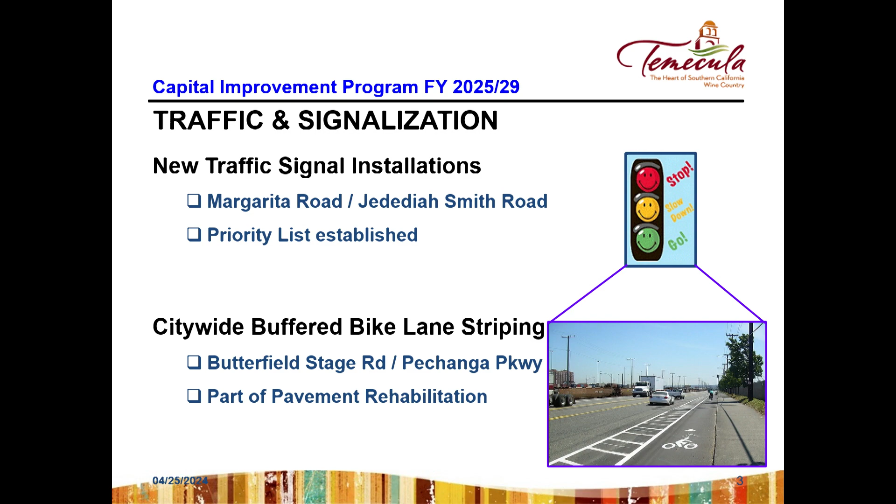We're going to be doing buffered bike lane striping on Butterfield Stage Road and on Pechanga Parkway. Then we have a set of 4 projects that our traffic engineer, Nick, managed to get a Highway Safety Improvement Program grant for, in the amount of $4.3 million. The first is the bike lane upgrade, doing the green backing for the bike lanes citywide. The second is pedestrian ramp upgrades at various school sites around the city. Then we have pedestrian signal equipment upgrades, installing ADA pedestrian countdown signal heads. And the last is safety lighting and signal communication, involving safety lighting, signal heads, signal wiring, traffic signal cabinets, and traffic signal timing. All these projects are currently in design, and when ready to be implemented, most of them will probably be implemented in the next fiscal year.

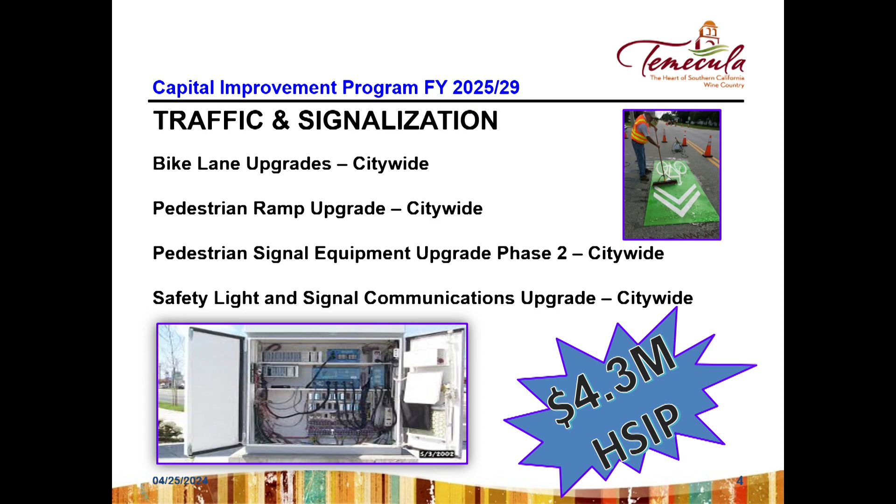Next, we go to roads and highways. One of the first projects is the roundabout on De Portola Road at Jedediah Smith Road. We received an $800,000 grant, the Economic Development Initiative, part of Congressman Issa's submittal. We will be initiating this, I believe, at the May 14 council meeting.

We will be approving an agreement for the design of this roundabout with a selected consultant. We also have Diaz Road, which we've been working on for some time. We're looking to widen Diaz Road from Rancho California Road to Cherry Street, delivered in 2 phases. We're almost done with the design of phase 1, from Rancho California Road to Winchester, and can go to construction in early 2025. We have to wait for EMWD to finish their sewer line, which is under construction right now.

The next one is the bridge over Murrieta Creek at Overland, which we've been working on for quite some time. Design is about 60%. We just got the environmental document approved for NEPA, the federal environmental document. The timing for this project is probably going to be fiscal year 2026-27. One reason is the Murrieta Creek Flood Control Project, which I'll talk about a little later. We have to coordinate the construction of that bridge with the proposed improvements for the Murrieta Creek Flood Control Project.

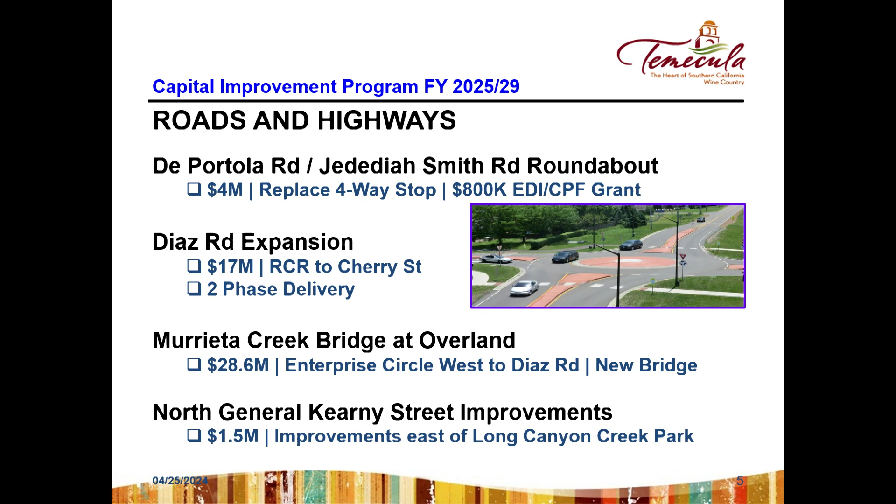We have a few more road projects we're working on. Overland widening will eliminate the bottleneck between Jefferson and Commerce Center Drive. The design is almost done, so in the upcoming fiscal year we'll be beginning some right-of-way acquisition that we need in order to widen that section of Overland.

We're also going to be adding raised landscape medians on Rancho California Road between Hummer Drive and Butterfield Stage Road. This will enhance safety and beautify the entrance to the city of Temecula from wine country.

The last project here is the Ynez Road Improvement Phase 1, widening Ynez Road on the east side between Rancho Vista and Tierra Vista by the duck pond. We're probably close to 90% plans on this project. We've submitted for the environmental permits, and once we get those permits, we can probably get this project out to bid for construction, so we're looking to do that in this upcoming fiscal year.

I got a question on that one. Yes, sir. Will this coincide with the opening of that housing unit there? Maybe Ron, he's working with the developer on the housing.

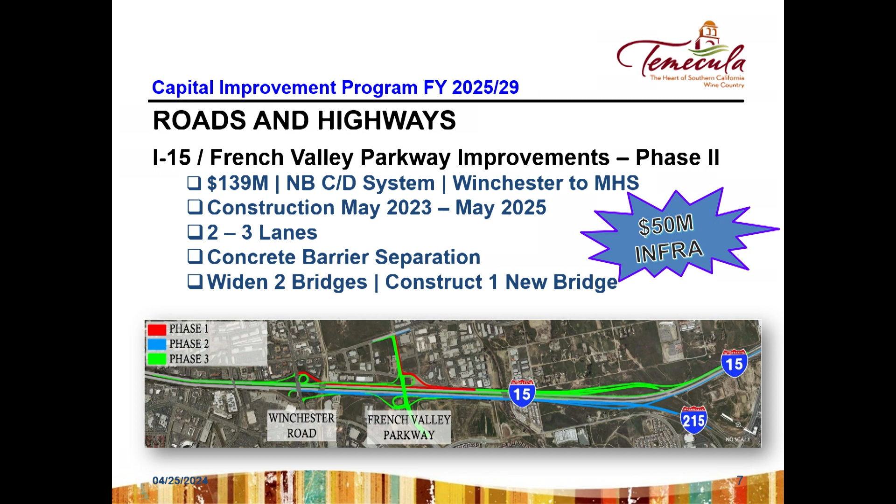We also have another freeway project under construction that began back in February - the auxiliary lane between the Temecula Parkway northbound on-ramp and the Rancho California Road northbound off-ramp. That project began in February, and we are set to complete it by December of this year. They're really moving along very well, the contractor is.

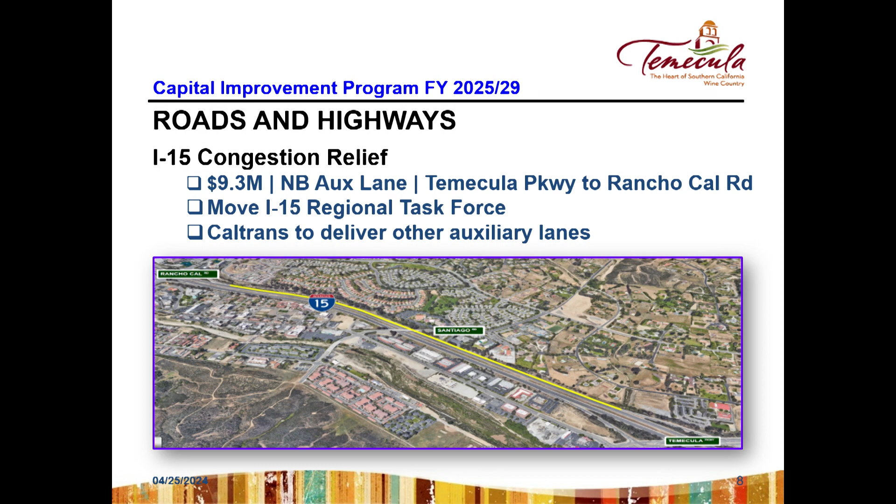Okay, as part of the city strategy to invest in our roads, we have a number of projects that are coming up. And before I go into these projects, we did a new assessment of all our roads this year. We do that every 5-6 years, so we just did the assessment.

We got some preliminary results, which told us that we're actually above average in the condition of our roads. Our pavement condition index is 71, which is a lot higher than most cities in the state, which are probably in the 60 range. Last time we did this assessment our PCI was 64.

So we've improved a lot, and that's because we've been investing to rehab our roads over the past 5-6 years, and we continue to do that. We have in the program anywhere between $3 million and $5 million every year dedicated for the rehabilitation of our streets. This upcoming year, we're going to be doing Butterfield Stage Road from Temecula Parkway to the southern city limit, and then Pechanga Parkway from Temecula Parkway to Via Eduardo.

We also have a separate project that's going to be done, Rainbow Canyon Road from Pechanga Parkway to the southern city limit. The Rainbow Canyon Road project is primarily going to be funded by our great partner, the Pechanga tribe.

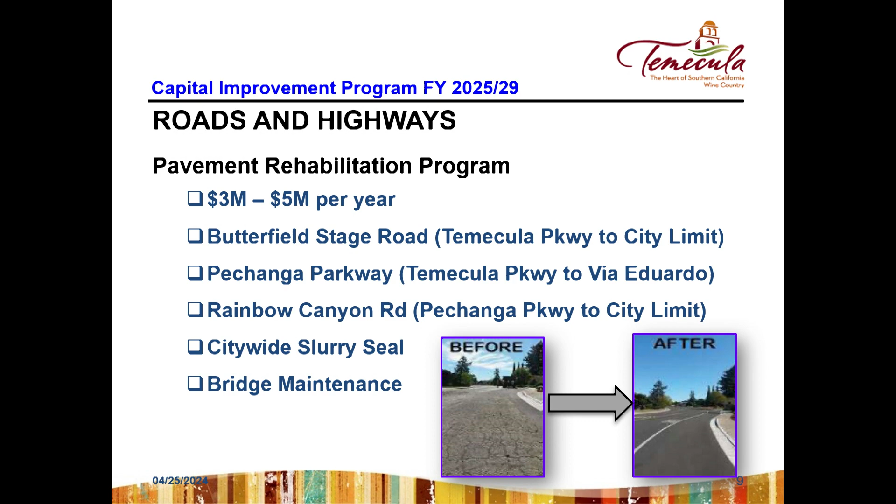We also, a few years ago, I think it was 2016, did a sidewalk gap study, and we've been working every year to do more sidewalks. So in this upcoming year, we have 3 primary sidewalk projects.

The first one is Pauba Road, from Elinda to Showalter by the library, and then Ynez Road, on the west side, between Rancho Highland and Tierra Vista. There's a missing piece of sidewalk close to the new steak place there.

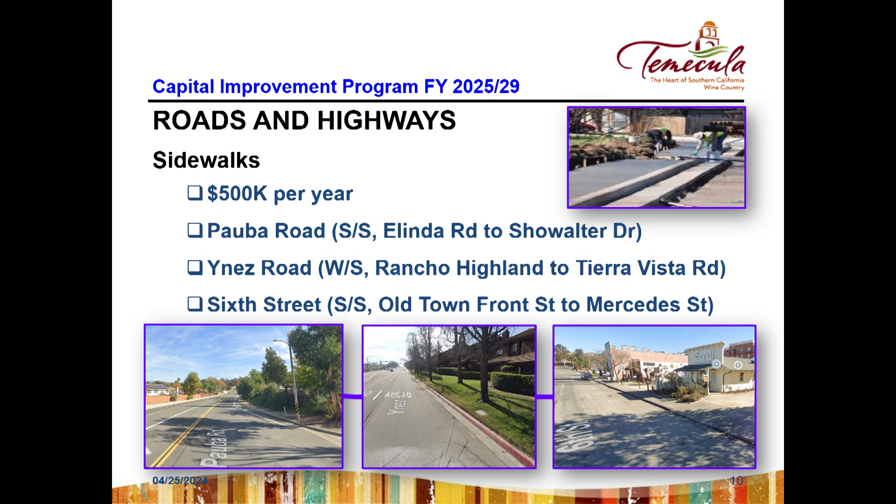And then in Old Town, we'll be doing the south side of 6th Street between Mercedes and Old Town Front Street. So those are all going to be done, probably within this year, before the end of this year, we'll be starting construction. They're all close to finishing the design and getting ready to go to construction. So we have a lot of stuff coming up in 24, 25 for construction.

Then we have a few other projects. A few years ago we did our ADA transition plan, and we've been budgeting the Community Development Block Grant annual funding to do ADA improvements. We've done a few facilities, like the Mary Phillips Senior Center and the Community Recreation Center.

Using these funds, right now we have a project under construction at the Ronald Reagan Sports Park baseball field. We're improving the accessible parking, and we have an accessible ramp that goes from Margarita Road down to the field now. It's already been constructed, and we're also making all the dugouts accessible. So that project is under construction, probably going to be finished sometime in May.

Next year, we'll be doing a large-scale ADA ramp project. We're already evaluating ramps throughout the city from the ADA transition plan, and we're going to put together a project to upgrade a good chunk of ramps throughout the city with the money that's been appropriated.

We also have, for safety, a couple of projects to add solar lighting to trails. The first trail is the Great Oak Trail, which is the trail on Pechanga Parkway between Deer Hollow and Loma Linda. And also, we're looking to add lights to the Murrieta Creek Trail on the east side through Old Town, from First Street Bridge to Rancho California Road.

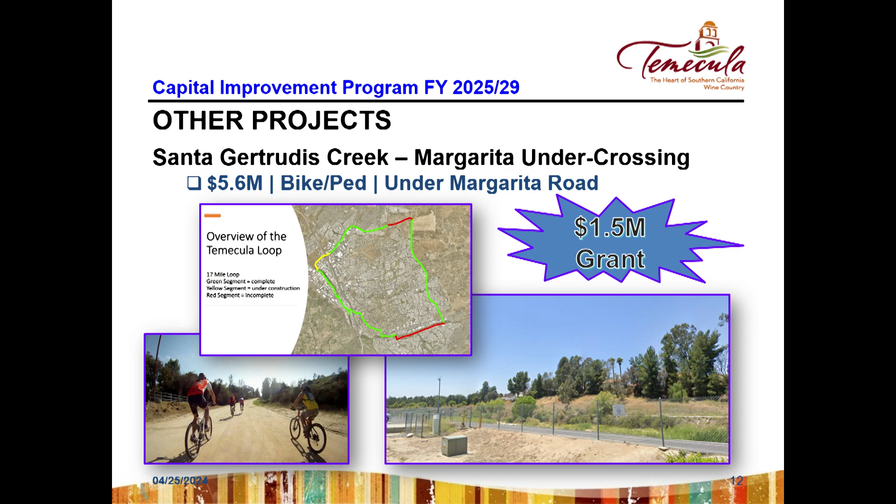All right, we're getting close, so be patient.

The citywide security camera system has enhanced the quality of life in Temecula by integrating safety and security practices through technology. The sites include parks, recreation centers, museum, and traffic intersections. The city has completed 24 public sites and more than 35 intersections with this project.

The other project that has to do with safety is the Fire Station 84 renovation. This project will renovate the training room, update the facility to be more efficient, including upgrading the windows and electrical systems, and repainting the interior and exterior. It will also add a separate small building as a gym next to the existing fire station. We're in the final stages of design and looking to bid this project for construction in the summer, with construction likely beginning in the fall.

So the last one is the Murrieta Creek Improvement Project. This is not a city project - we're partners with the U.S. Army Corps of Engineers and Riverside County Flood Control. I wanted to give you an update because there's been significant development in the last couple of months. The federal government allocated about $39 million to the construction of this phase as part of the House and Energy and Water Development Appropriation Bill, approved by the House and Senate and signed by the President on March 9th, 2024.

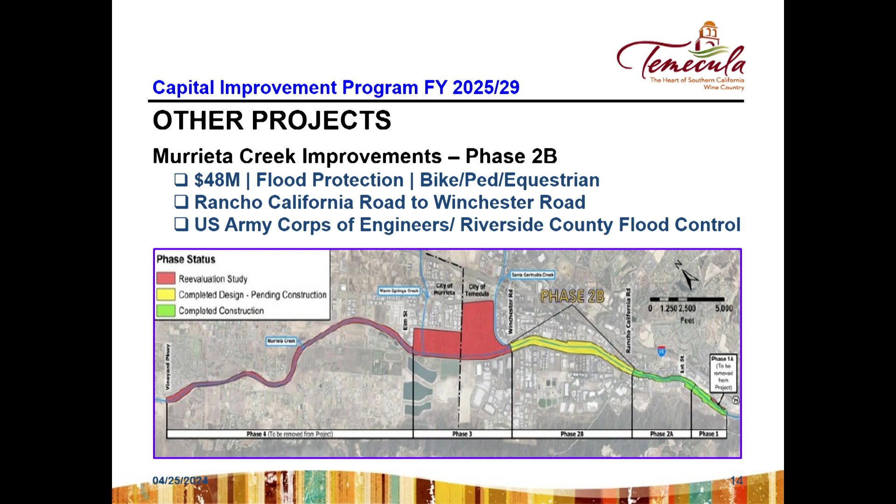This concludes my presentation, and I'm here to answer any questions you may have.

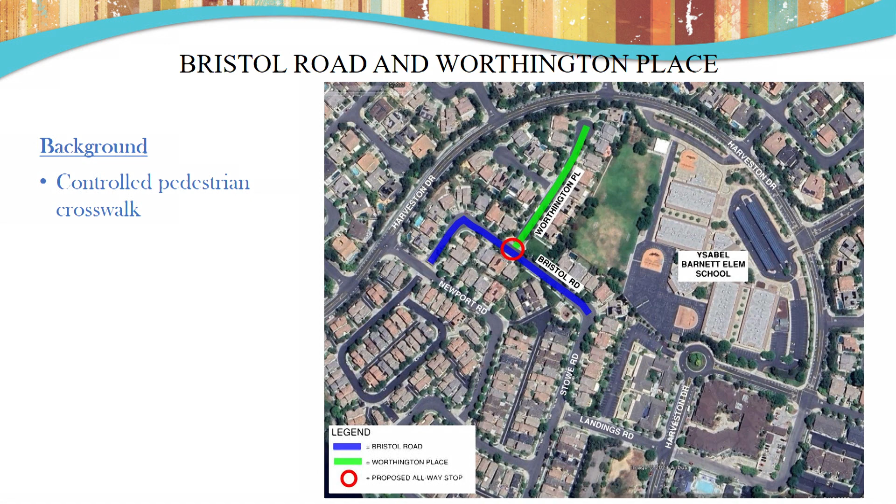Some background on these roads: as you can tell, these are residential roadways serving a small group of homes each. Bristol Road is around 42 feet wide and around 860 ADT, and it's a 25 mile an hour road. Worthington Place, a smaller street, 36 feet wide with about 100 ADT.

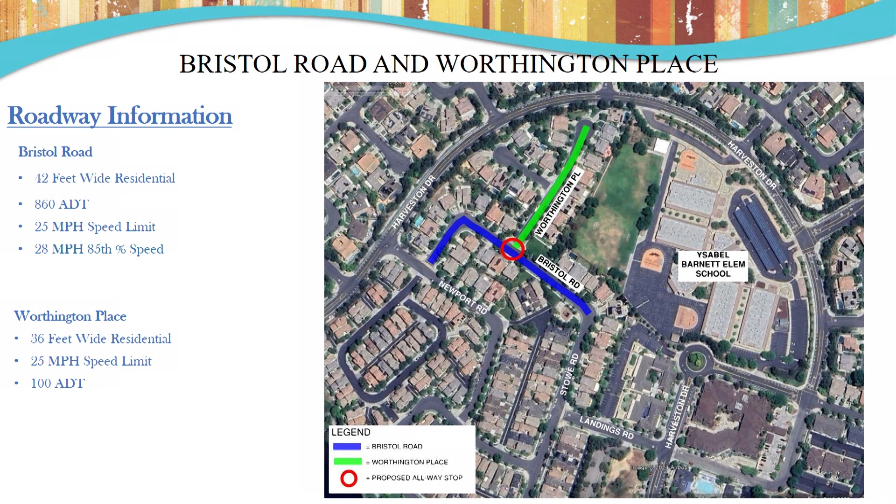During the visits, we did notice that there was some pedestrian volumes, and there was some uncontrolled crossing going on. Based on this, we determined we should run a stop controls analysis to determine if an all-way stop was justified.

Our analysis has included data collection and review, intersection volumes, collision history, sight distance, and then an overall multi-way stop warrant analysis.

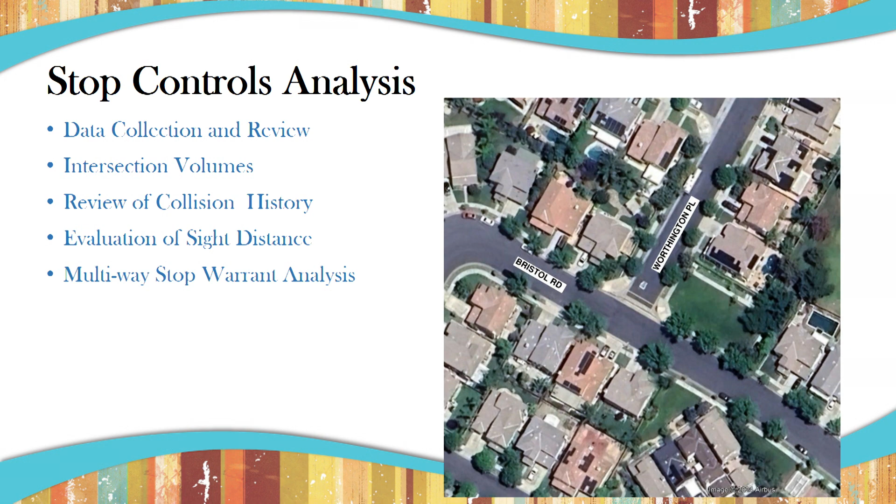The city used their StreetLight data program to pull data to determine traffic volumes. And then we also did some collision history, and we found that there were 0 accidents in the past 3 years.

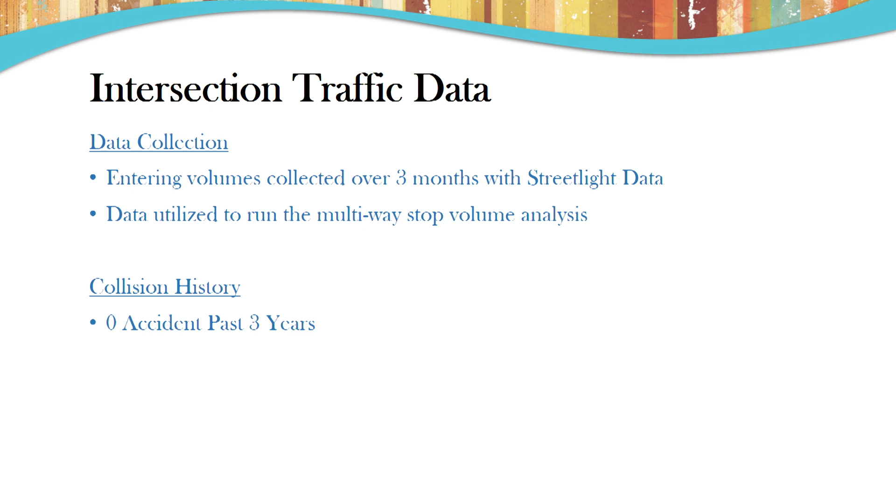We performed a sight distance evaluation. The required visibility for a 25-mile-an-hour road is 150 feet, and we have adequate sight distance in both directions from Worthington Place looking down Bristol Road.

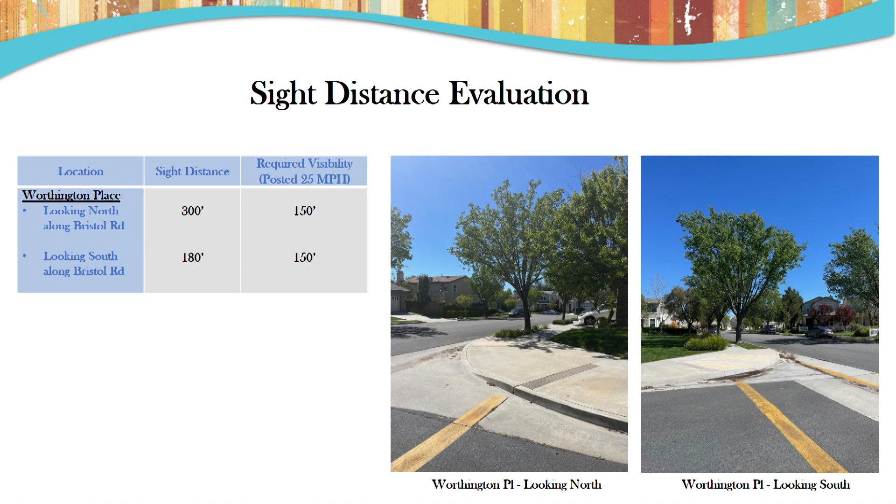So when a multi-way stop sign is not warranted by the traffic volumes, collision history, or other engineering constraints like sight visibility - and none of these have been met - we go on to other criteria conditions that we can look at.

Some of the ones we looked at are the roadway characteristics, and also is this near a school, is it a suggested route, is there heavy vehicle-pedestrian conflicts. We do meet some of these criteria, but while we looked at these, we also determined that we don't feel that these are necessarily really significant, considering the scale of these roads - they still aren't necessarily huge justifications for an all-way stop.

And some of the considerations why we don't think this is necessarily a good location as an all-way stop: if we were to put an all-way stop, we would need to go ahead and upgrade the pedestrian curb ramps and make them ADA compliant.

One issue, as you can see on the screen, is we would have to put a ramp at this location, and this location has a variety of issues. One is there's a tree there with roots, and we'd have to cut out roots, potentially killing the tree. There's also a drainage - it's hard to see, but there's a little circular drain coming through the curb that's actually for that resident, so we'd have to do some reworking of drainage.

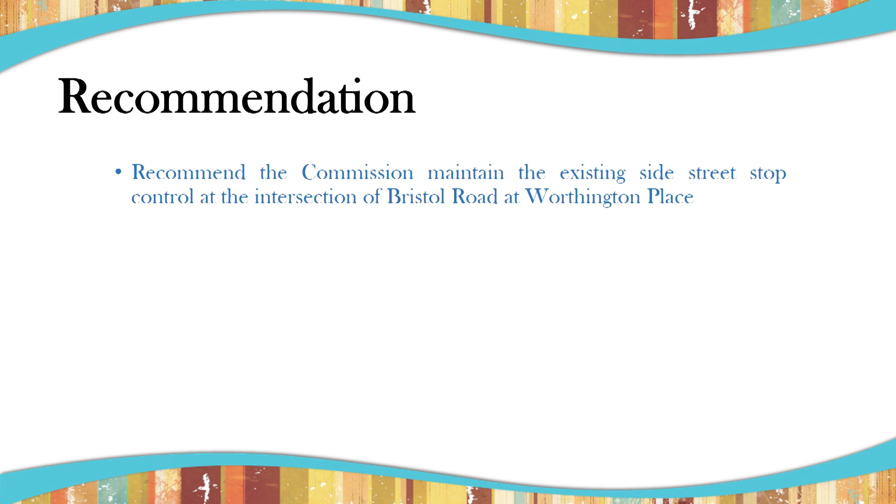But for these reasons, we determined that an all-way stop should not be considered ultimately. With that, we recommend the commission maintain the existing side street stop control at the intersection of Bristol Road and Worthington Place. And with that, I can open up to any questions.

I went out there a couple of times, but today I happened to be there when school got out, and I noticed a couple of parents had vests on and brought out some cones. I started talking to one of the gentlemen there and told him I was going to be here, and I think you spoke to him too - he mentioned your name. They saw no need for a stop because of all the things you said, but not about the ramp or anything - it's because it only happens periodically, and they work really well with the principal at the school. I think they've already got it settled, so I agree it's probably better left as is.

That's how the initial complaint came to us over a year ago - the school was trying to dictate to the city to put a crosswalk there. The school allows parents to use that gate to let kids in and out, but they've worked it out with the residents of those streets to give the kids passes, so to me that's a much better solution than to put a stop in.

Yeah, because he said they used to go there and wait. Where I was parked, just to monitor it, that's where people used to park to pick up their kids. But they worked with the school now, and that's prohibited by the school - they have to pick them up elsewhere. So yeah, they've worked it out themselves, and it works out really well now.

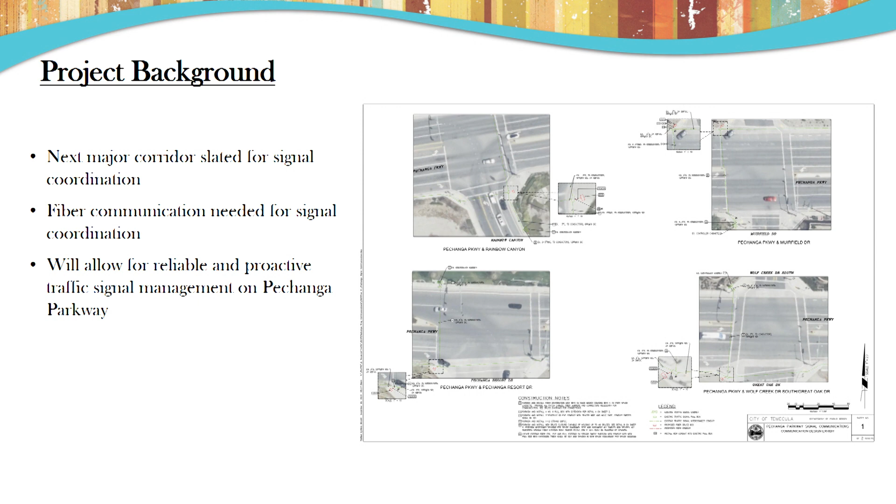A little bit more on the project: it's going to provide fiber communications to all the signals on Pechanga Parkway - I believe it's about 10 signals from Temecula Parkway to Deer Hollow. We'll install fiber optic communication systems, including fiber optic cables, fiber equipment, traffic signal controllers, and some traffic cabinet network equipment.

Staff actually developed the plans and designed it in order to save time and budget. Staff is also going to be developing and implementing the coordinated signal timing plans. That'll be the first for the city, so we're trying to expand our horizons here and really learn how to do that more. I used to do it at my old job, but I've got to dust the cobwebs off a little bit more.

The fiber communications is going to be installed in early May. They've actually already done some markouts out there, so they're planning to go out there next week. And then signal coordination, we're still working on that design, and we're hoping to implement that by September.

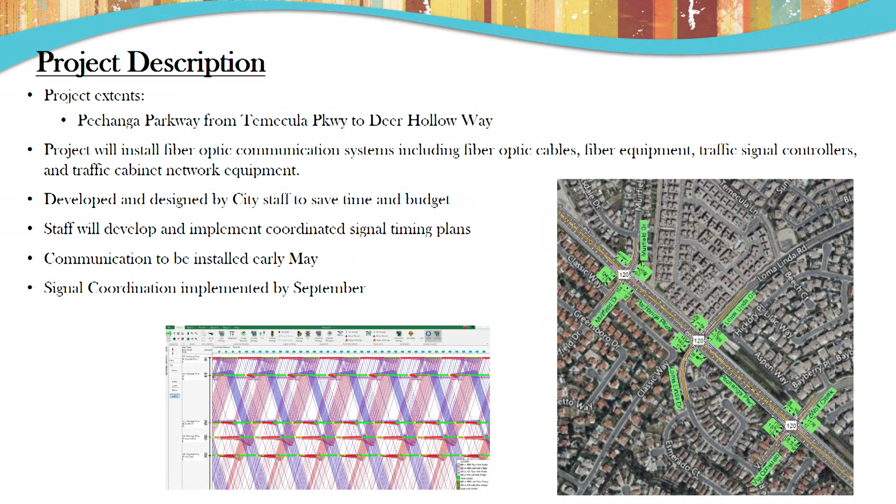With that, we'd recommend that the Traffic Safety Commission receive and file this report for staff to implement fiber communications and signal coordination timing on Pechanga Parkway.

Very good. Any questions or comments? Go ahead. A question, and I know you spoke about this before when you did Temecula Parkway, but could you explain again how this thing works? Because I drive both of those roads, and I get stuck at a light, and it seems like forever if it's from one of the sides. And then when you turn, I end up stopping at each light down the way, and I thought it was supposed to be coordinated.

Yeah, it definitely shouldn't be like that. You'll definitely get stopped on the side streets. But once you start to get into the main corridor, you should be getting a pretty consistent green and not stopping every single one. We can talk offline to find out exactly where that is.

I was just curious because I remember the presentation, and then I'm driving it, and when I was coming out of one street, I expected to sit there, but then I caught the next two lights, and after that it was fine. But I guess, does it kick in from the side streets? And so that would throw it off for a couple of sequences?

No, so we base all our timing on what Caltrans has at their corridor. So we use that as our basis, and we develop our whole cycle time, our cycle length for each signal. Each signal can kind of be thrown off with pedestrians crossing, potentially a fire engine turning on their strobe. Typically it really does improve the traffic, but there will be times where sometimes you get cut off on a left turn. I know everyone's experienced that a little bit, but generally it should be reducing the stop and go for the most part. It's only happened a couple times.